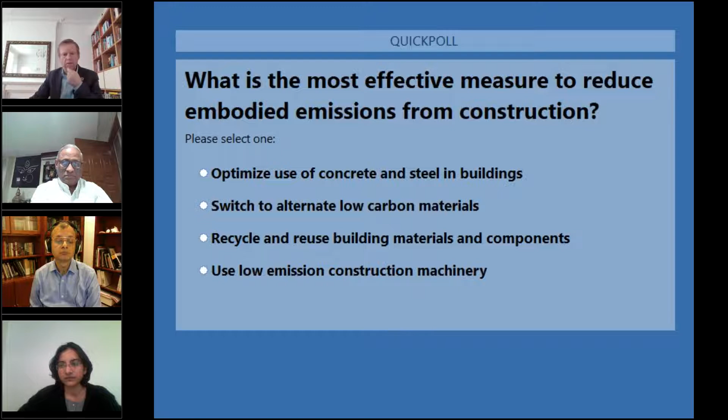I hope all of you can see the results of the poll on your screen. So the maximum vote we have got for the third option, which was recycle and reuse the building materials used. So thank you for sharing with us your response.

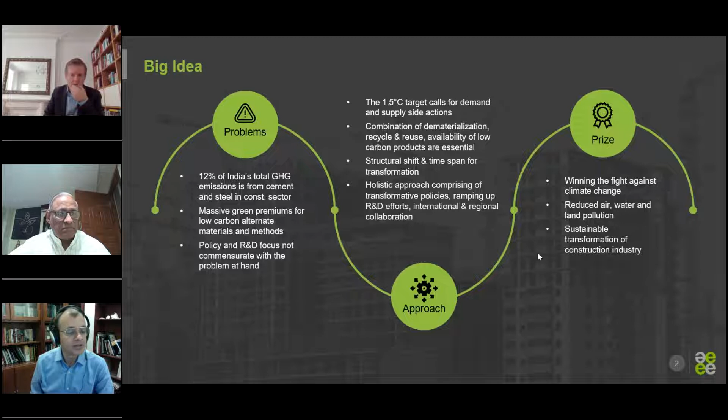So that is the problem, and I think we all would agree that the prize is pretty big to take it upon in a massive manner.

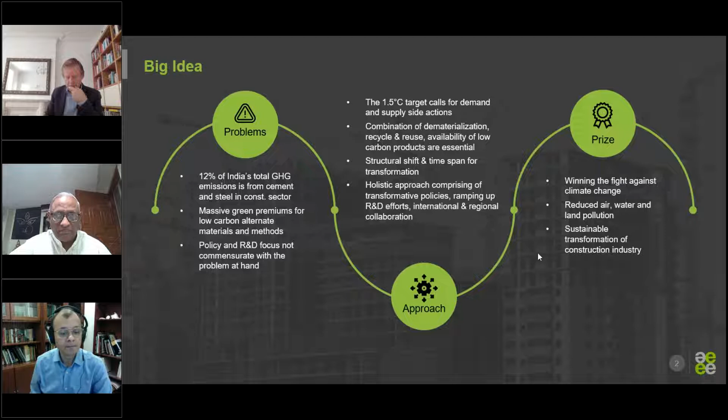So essentially, these are just numbers to set some context that I want to share with our viewers. If we look at the construction sector, the gross value added contribution from this sector is about 7%. It generates employment for more than 50 million people in India. So a fairly large number of people's livelihoods are dependent on this sector. So it cannot be that a problem we come up with doesn't start to address some of these challenges at the same time, which are more socio-economic in nature.

And when we talk about the economics associated with it, just the real estate portion - we know that infrastructure is where a lot of cement and steel is used. But just the real estate segment, we are talking about 65,000 crores. If I translate that in US dollars, it's about $8 billion, which is what the real estate market is. That is expected to be in 2040, and that is going to be about 5 times bigger than what it is right now.

If we look at the numbers in terms of the greenhouse gas emissions impact - as I said, 30% of the emissions comes from the construction sector, from the building materials that are used, and 40% is coming from the steel and cement sector out of that 30%. So its impact on greenhouse gas emissions is significant.

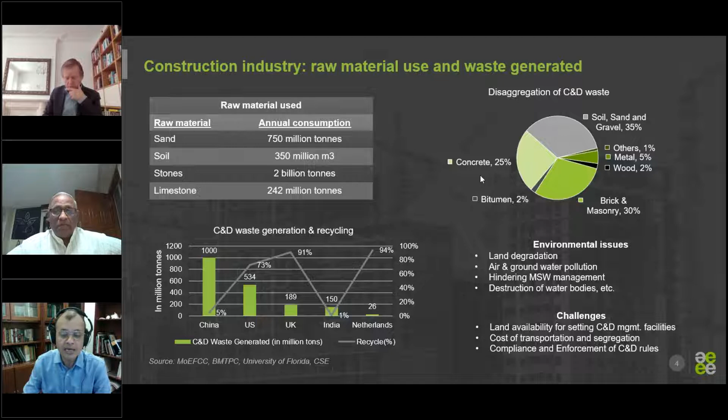So what has India done so far on some of these things? If we look at two aspects of energy consumption from a construction industry perspective, the first part is the embodied energy. I'm sure Professor Ashok Lal is going to talk about some of these things in his presentation. But most of the effort we have put in place, whether in policy or R&D, a lot of it is focused on operational energy consumption.

If we talk about building energy code, standards and labeling, or enhancing the efficiency of appliances, or even some of the later initiatives like global cooling prize and other things, most of these are clearly focused on improving operational energy efficiency. We don't really see what is happening once the building is constructed. Once the structure is ready, we forget about the embodied energy that went into the construction of these structures. That is a very important point I would like to highlight.

Same thing if we look at the PAT program, which is another very ambitious program of Bureau of Energy Efficiency, and it is doing well. But are we thinking about substitute materials for cement or steel, and what kind of innovation or policy push or R&D support is being provided? We don't see that becoming mainstream very soon. That's the challenge we face from the current actions on the policy, R&D, and technology fronts.

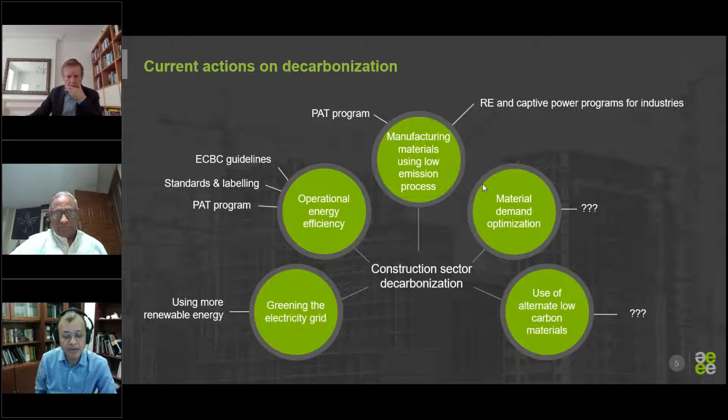So wrapping up, I go to the last slide where I'm going to pose three questions for our panelists. Different people are going to be addressing these questions. The first question, where Tim is going to be very well suited from his work at Arup, which does a lot of work in the infrastructure space and on the sustainable front: what is the best practice in terms of the international approach for low carbon transition in the construction industry, what could be relevant for India, and what should be the Indian future construction trajectory if we have to really grab this bull by the horns and take some concrete actions.

The second question is, what is the scope of design and construction innovation in this transition? Because we know that sustainable energy transition, keeping emissions at 1.5 degrees centigrade level, are very important questions for humanity right now. What is the role of the design and construction industry in this? And how can material demand be optimized for future building constructions to reduce embodied carbon in the structures and infrastructure that we are designing?

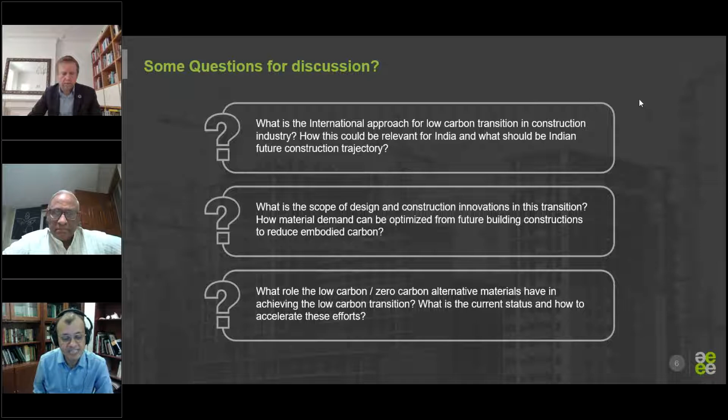The third and last question is, what role do low carbon or zero carbon alternative materials have in achieving the low carbon transition? How good are these materials? Are they ready for prime time? And what kind of policy or business support is required to make these materials mainstream? What is their current status and how to accelerate some of these efforts? Thank you very much, and I look forward to the discussions and to the presentations of my fellow panelists. Over to you, Shravani.

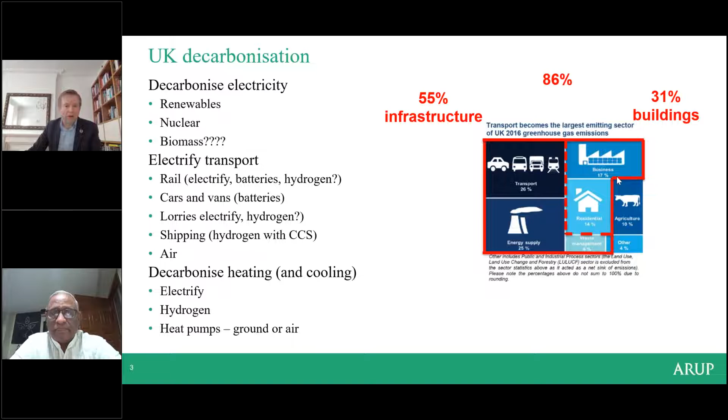The fundamental things we need to change here are how to decarbonize electricity, and the UK has done a huge amount of that over about the last decade. Very big changes to the grid, lots of renewables, new nuclear, and I'm putting biomass in question marks because we also have some biomass, and I'm very skeptical about whether that should count as low carbon. But these very big changes were made, costing an awful lot of money, but it's actually done an awful lot to decarbonize the UK.

We need to electrify transport: rail, cars and vans, lorries, shipping and air. We're making some progress on this, but not nearly enough. And we need to decarbonize heating—and I recognize in India cooling is a bigger issue for you, and there's lots of work to be done on that as well.

So we've just started on a voyage of how we can actually decarbonize a major economy. We've made good progress, but so far we've only really done the easy bits, and the more difficult bits are going to cost a lot of money and will end up also needing lots of societal change.

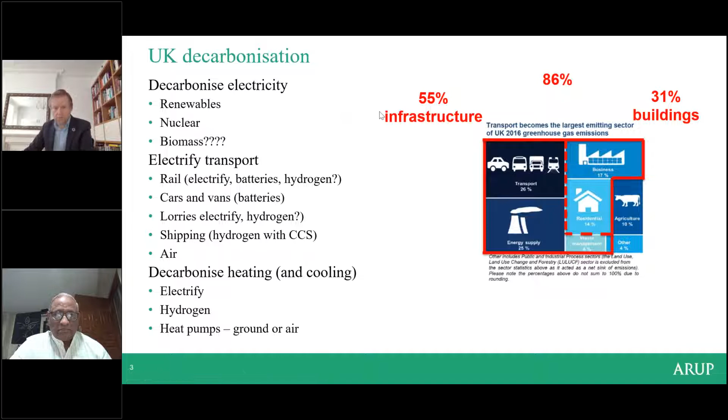I'm just going to touch on the topic of net zero. Overall, as a species on this planet, we emit about 40 or 50 billion tons of CO2 per year, largely in energy use, but also in some other areas as well. Doing this at a species level, on a global level, is fairly easy to understand how we decarbonize. We need to change the overall flux of CO2 going into the atmosphere.

As a nation, it's also fairly clear because our boundaries are fairly closed. There's some difference between the territorial emissions, what we actually burn in our particular country, and what we actually import and export, our consumption-based emissions. But overall, we can actually do these sums fairly clearly as well.

But in the UK, an awful lot of city regions and companies are declaring net zero, and it's actually quite difficult to know what they mean by this. And if they're just going to do it by offsetting, it might not be the right answer for us overall. So I love the concept of net zero, we need to try and achieve it, but I'm a little bit worried that a lot of people are declaring it but might not really be doing it, and this might not be so good for us all.

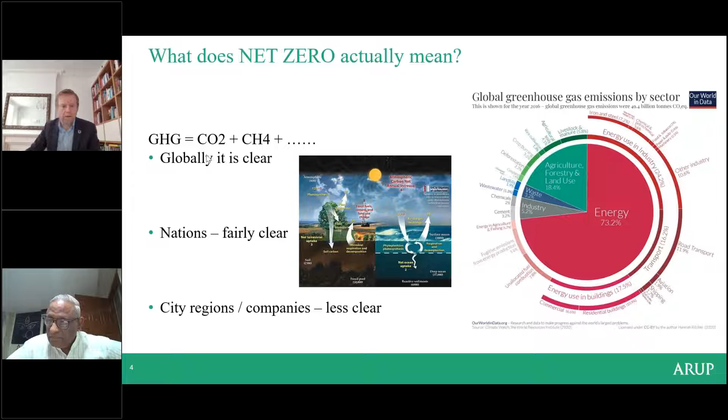And also just thinking about the society we wish to create—we're going to change how our whole economy works, actually change all of our power, all of our transport systems. We need to have a vision for a future that we all want to partake in.

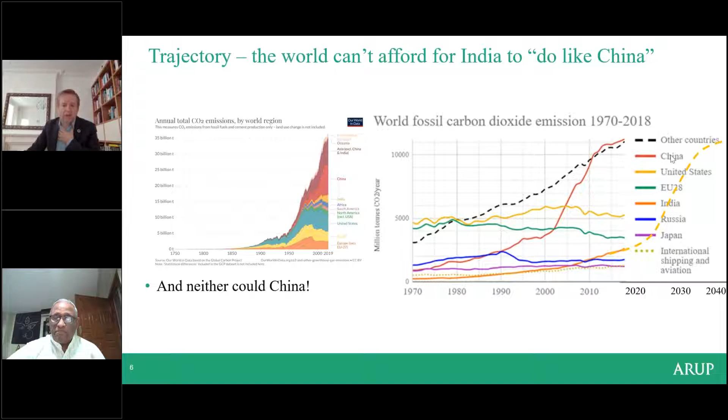Very quickly, were India to actually go on this very high trajectory, emitting 10 or 12 gigatons of CO2 per year, then India would have a huge effort to try and reduce that afterwards. The right-hand graph shows what China has done, the huge increase in its emissions, and now the necessity to get them down very quickly, which is going to have to change its whole economy.

So the critical issue here is trying to learn from what the EU and the UK are doing. The UK has done all the easy things so far. The UK emitted about a gigaton 10 to 20 years ago, but by stopping coal generation, adding lots more renewables, and also offshoring manufacturing—which doesn't help the globe at all—the UK has made some really big strides. The EU has now made the same commitment and is showing a similar trajectory, both trying to reach zero emissions by 2050.

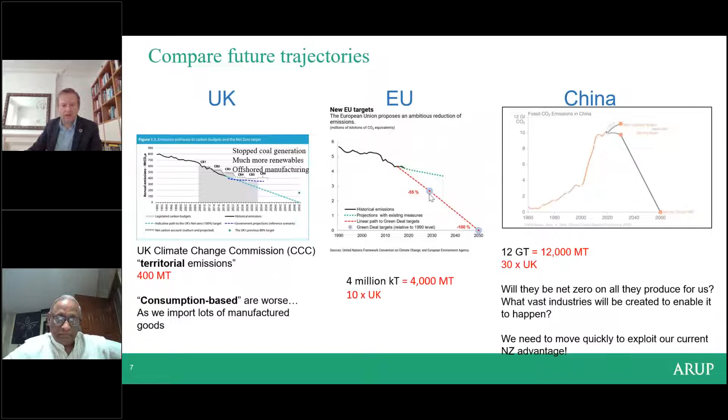So there's a lot to be done. To help with that, I'd like to introduce very quickly a standard called PAS 2080-2016. It's being updated at the moment and is likely to become an ISO, so it will basically be one of the UK's gifts to the world. We worked out in a very complicated way how we could decarbonize construction, and especially infrastructure. This is the world's first standard for managing whole life carbon in infrastructure systems, and as part of the update, it's going to be extended to buildings as well.

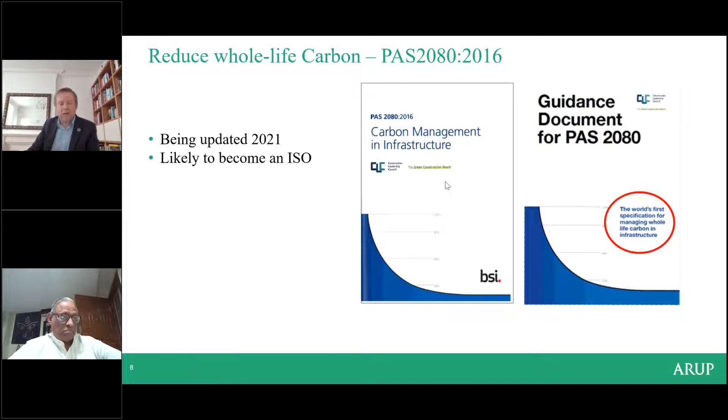Very simplistically, what it tries to do is create the correct big picture view on everything. By looking at everything on a national basis, it gets rid of perverse incentives. Very simply, it defines carbon as capital carbon—also known as embodied carbon—operational carbon, and use carbon.

So giving the example of a major airport: capital carbon is actually building the terminals and the runways. Operational carbon is how the airport is run—so the lighting in the airport, the ground staff who maintain it. And use carbon covers all the people who come along, fly planes, land them, and the carbon they emit.

Currently, these are excluded from international debate about carbon emissions. They're excluded from national figures and left in their own box, so nobody really owns them. But increasingly they're being owned, and Britain is now taking measures to own its use carbon figures of what we emit globally. From the airport operator's point of view, they can control the first two, but can only really influence the airplanes that fly into the airport and things like that.

So the critical thing here is PAS 2080 allows us to invest to save and optimize to reduce. It uses the same terminology as CapEx and OpEx, which we use for money, and I think that makes it very easy to relate to. I'm not going to go through the figures in great detail, but it shows what happens with UK emissions in each of the infrastructure sectors.

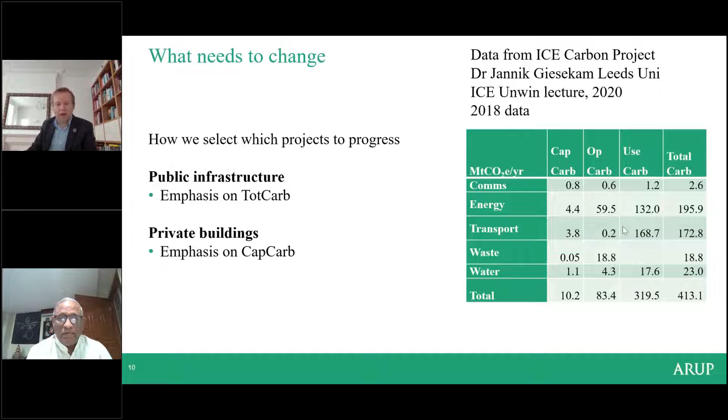There's no point, as an example, building a new road that can only take gas-guzzling cars and hugely emitting heavy goods vehicles. We need to make sure India creates a transport network that's also easy to use in a low carbon way.

So how should we pick the right projects to build? We need to make sure there's a clear investment case. In the UK this is called the Treasury's Green Book, which goes through how government should appraise schemes. Traditionally this is really focused on the benefit to cost ratio, because money talks, and the Treasury is worried about spending money and getting good value for it. This will still persist in the new world because money remains scarce.

But actually, carbon is scarce as well. And therefore we need to talk in the same way about BCR - we need to talk about value for carbon and making sure every project we do is a step towards a low carbon future. It also should enhance society, make sure we worry about societal capital and enhancing nature as well.

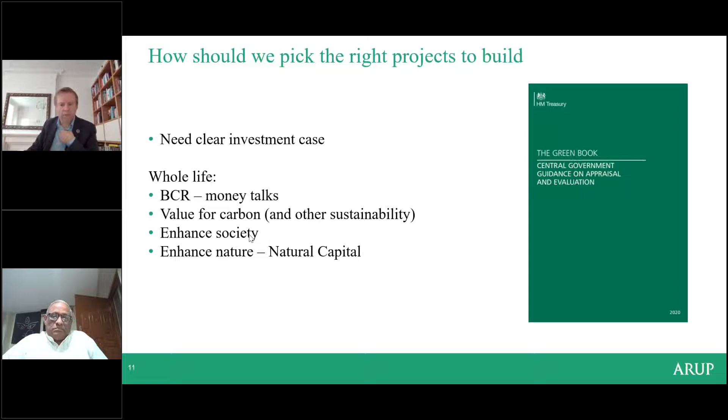But we also need to make sure that as we do the projects, we satisfy the client's sought outcome and we don't compromise whole life carbon. An example, a new rail project - I'm seeing people at the moment building examples like High Speed 2 in the UK, a very major new high-speed railway line. People are trying to make the capital carbon smaller, but actually the critical thing is the stations we build are attractive to users, so we stop people using their cars instead. The critical thing is to solve the total carbon problem, not just the capital carbon.

And we have the hierarchy of doing things: building nothing, building less, building clever, and building efficiently. Sometimes the best thing to do is to build nothing and use technology or something else as the right solution. Then we work our way down this hierarchy, and ultimately, where we have to build something, build it efficiently instead.

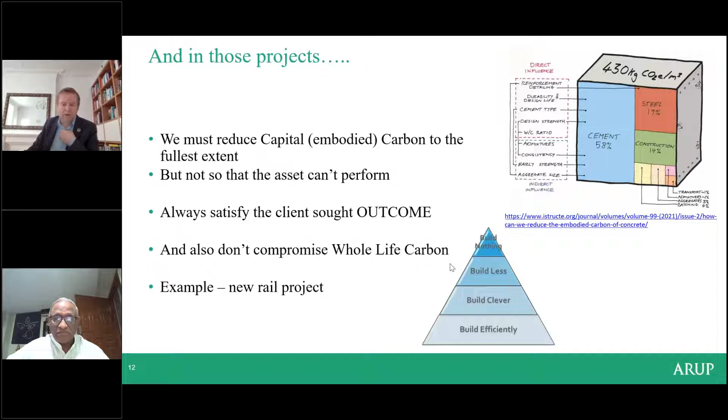So for India, echoing what Dr. Satish said, we need to mitigate for 1.5 degree warming of the world - it's absolutely critical we follow this. India's got the chance to avoid the mistakes we've made in the developed world. Every Indian has the right to become fully middle class like we are here in the West, but do it in your own better way. Go straight for the right answer - don't make the same mistakes that we have made.

So invest in public transport, but make your cities livable at the same time. Invest in electrified rail, make freight transshipment simple. Use solar and other renewables - we all need to find better batteries. Ban coal quickly and invest in nuclear.

With lots of hydrogen and carbon capture and storage and everything else, and ultimately direct air capture to make sure we capture the errant emissions. Choose the right buildings, make them flexible and capable of repurposing, so you don't need to keep on rebuilding them like we have done here, and make the circular economy work.

But in parallel, we all need to adapt for a 4 degree warming as well, because I must admit I'm skeptical about whether we can do enough quickly enough to make the changes. So we need to mitigate and we need to adapt. That's the end of my talk. Thank you very much for your attention.

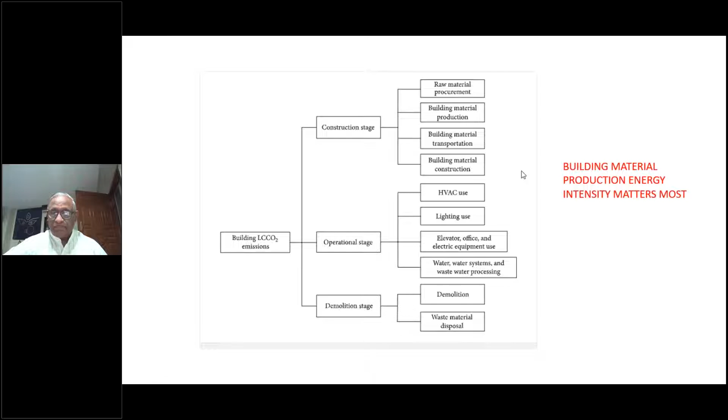I think this is just a kind of a review of the overview on buildings that Tim was also showing us, just to say that in this particular talk we are talking about the embodied energy in building construction, particularly the materials part of it, the production of materials and the use of materials in the buildings. I'm ignoring at the moment the transportation and the lifetime and the recycling potential of it, etc. Just looking at only the materials that are consumed in the making of the building and the embodied energy cost, so to speak, of the making of those materials.

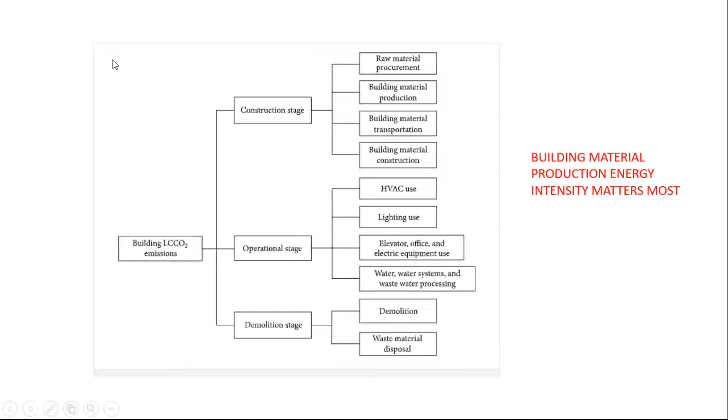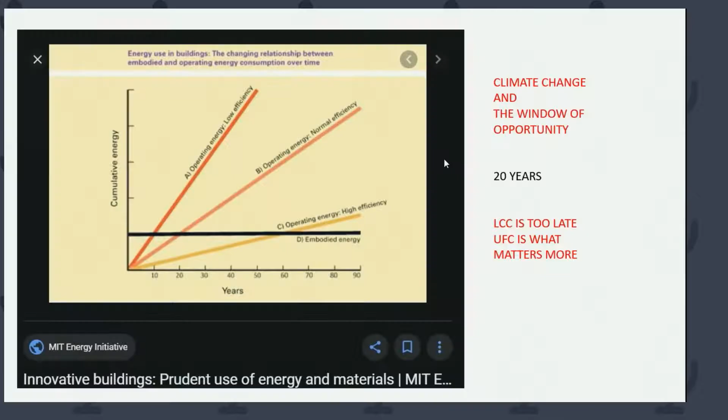This is an important slide because what it shows is the black line indicating embodied energy, which, according to the theory of life cycle costing, can be amortized over the life of the building, which can be 60, 70, 80 years. This was at a time when the operational energy of buildings was quite high, especially in the West, and that is the red line going steeply up. As you improve the performance of buildings operationally, that inclination begins to come down, and eventually, as you get very efficient buildings, almost net zero emissions in operation, you get a much flatter line. But what it does show is that embodied energy becomes a more important component of the overall contribution of carbon dioxide emissions.

What I really want to point out is that if we say we have a window of opportunity of not more than one or two decades within which to reduce the carbon footprint of buildings, then especially in India, when we are going to multiply the amount of building needed for a growing population in the process of urbanization, we have to pay a lot of attention to embodied energy. That is actually the greater job than the operational energy, especially of housing stock.

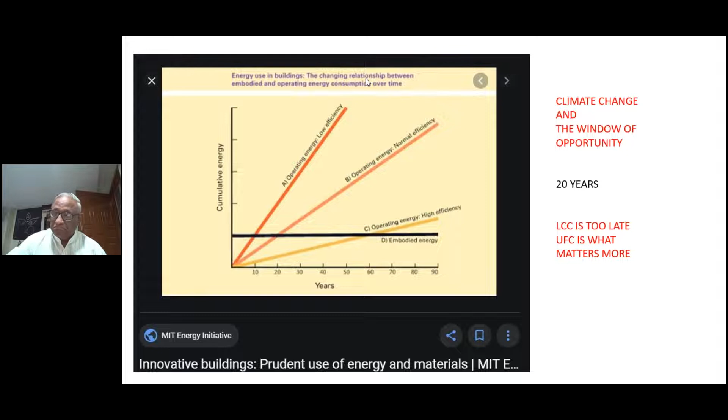Next. In buildings, this diagram is a very simple one, but what it shows is that something like 65 to 70% of the embodied energy of a building is attributable to what we call the structural system and the external envelope of the building. So this is where the bulk of the embodied energy is located. When you have very intensively serviced buildings with a lot of air conditioning, piping and servicing, that also, because of the extensive use of metal, becomes quite a significant consumption.

But in our case in India, most of the buildings we are going to be building are going to be relatively simple in terms of the services they incorporate. So actually 70 to 80% of the embodied energy of construction is attributable to the structural system and the building envelope itself. Next.

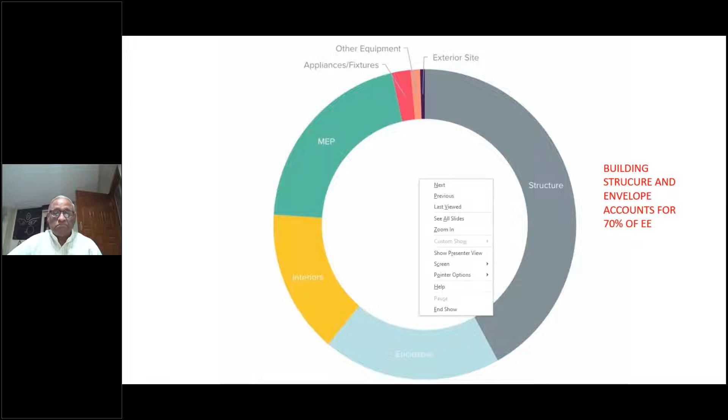This is a project we did several years ago, and we did an analysis of it. What this analysis shows is that, as Tim said and as Satish said, steel is a big culprit here. Steel and concrete and reinforced concrete are the big culprits. So you'll find that by mass, steel is not more than 2 to 3% of the total mass of a building. In cost, it's significantly higher. And in embodied energy, it takes the cake.

So here's a good pointer. If you're going to have a strategy about controlling carbon emissions in building, watch out for steel, watch out for concrete. Next.

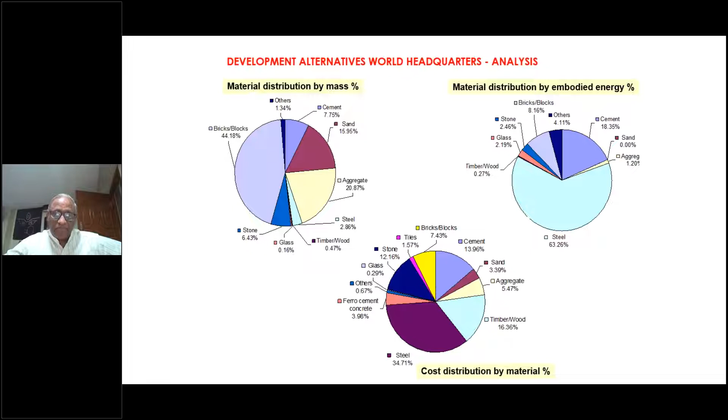The other thing to look out for is that we should look at 3 kinds of buildings. I'm talking about residential buildings here. So we have lots and lots of buildings which are now becoming 2, 3, 4 stories high as cities become more dense and land becomes a little bit more scarce and people want to live closer together, 3, 4 stories high. But in some cities, they say no, you must build taller. They go 7, 8 stories high. And in some cities they say, no, you can go as tall as you like, and you build 10, 12, 15, 20 stories high. So you've got these 3 kinds of buildings that are coming up.

And there's a shift. Somehow the belief has gone around that you have to go vertical. You have to go vertical. You have to be like Singapore. You have to be like Hong Kong. You have to be like New York. That is modern, that's the way to the future. Something is wrong in that calculation. And we will see now why, if you just compare the sizes or heights of buildings. Next.

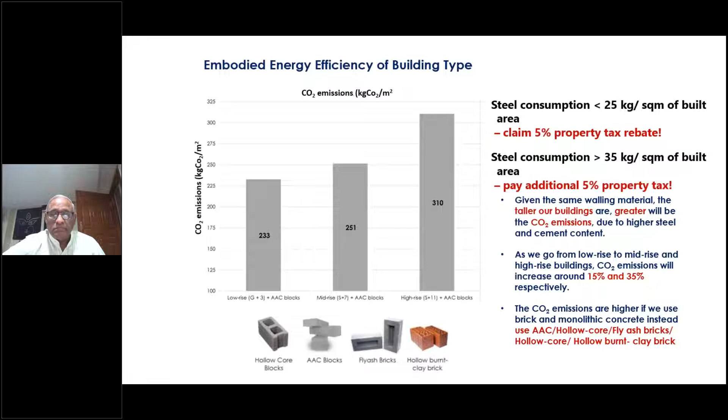It's not only about substitution of materials, it's not only about economical design for whatever you have to build, but it is also about making choices about the kinds of building that we need to build in order to conserve embodied energy. And also there is a potential of substituting some of the walling materials, the infill materials. There's a movement towards all reinforced concrete walls inside, outside, everywhere. They think that's the right thing to do, but it's going completely in the opposite direction from trying to reduce embodied carbon in construction. It is actually accelerating the increase in carbon emissions due to construction, if we go that way.

Next. When you click more, something will come. Next.

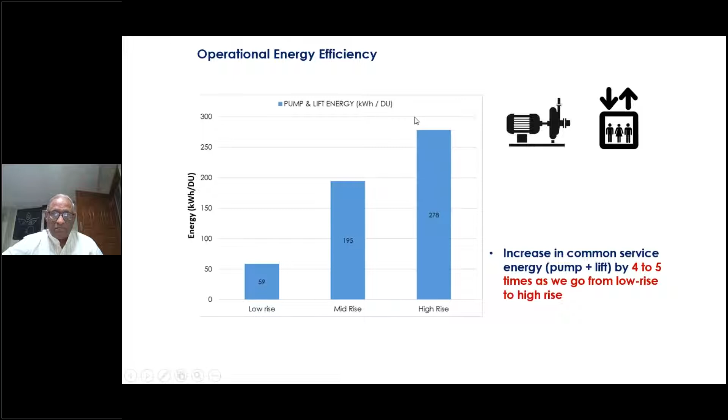So I just want to show these 2 slides just to say that as you go taller, your operational energy also goes up. And as Tim was saying, not only do you want to conserve energy at the time of construction, you want to conserve carbon at the time of construction, but you also want to build in such a way that later on you don't have to pay a price for it. So again, building taller has that difficulty.

One interesting thing for India, particularly if you're talking about net zero possibilities for the future, is that the ratio between the rooftop available for converting sunlight into electricity, if you're going 4, 5, 6 stories high, is favorable for you. You can find almost 80% of your annual energy needs for simple living in homes if you build 4, 5 stories high. As you go taller, that ratio deteriorates. And so there's another reason, looking at a total systems approach towards net zero. Next.

Also, it so happens that steel and concrete are really the more expensive part of the building in any case. So if you save there, you make buildings more affordable. So it's really about choosing the type of building and also choosing how you build the structure and the envelope. Next.

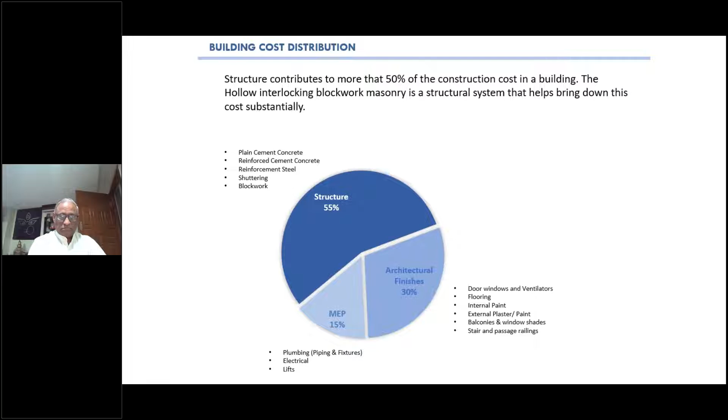Well, this is just an example of a building that was built about 10, 15 years ago. Development Alternatives. Next. We'll talk about it a bit.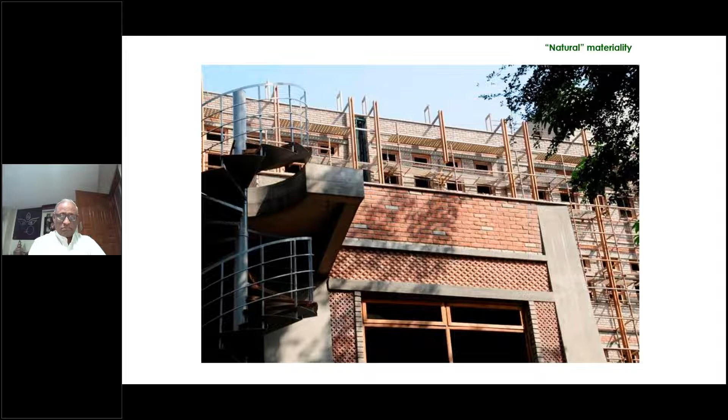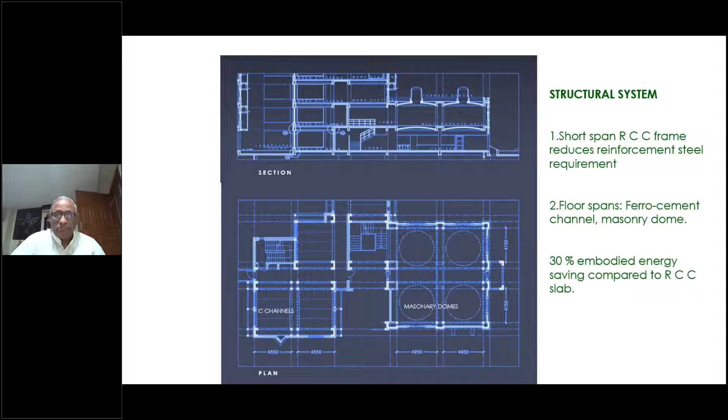Here, what was done was that the horizontal spans were either ferrocement shells or shallow domes. And the ferrocement shells significantly reduced the amount of steel consumed in spanning the space. And the shallow domes eliminated this steel entirely. There was no steel, no concrete. It was just a masonry dome, but it was shallow. So this was an innovation, not very scalable, but it was a demonstration of how ingenuity and design can still, for modern buildings too, work with less steel consumption. Next.

Here's a picture of it.

On the right-hand side, you see the shallow domes. On the left, you can see a substitution of the external walling material. Here, the old earth building, in place of which the new building was built, was pulverized and converted into cement stabilized blocks in combination with an inner lining of earth blocks and an outer lining of fly ash blocks. So very low embodied energy in the external envelope of the building.

It's a substitution of what might have been traditional brick or concrete. And this is, you have to think about the detailing and the use of timber for doors and windows—well detailed, well seasoned timber instead of aluminium. And actually you get very high performance windows at the same price as modern aluminium windows, but at 1/20th, 1/30th of the embodied energy cost.

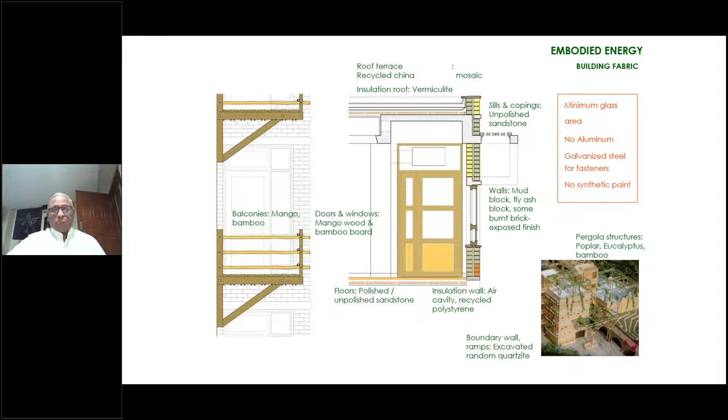Here's the alternative materials that were used for walling. There are many options that are still available, and people are moving in that direction gradually. But still, it's not quite scalable. That's the issue. I think it's a question of getting, if there's better demand and the quality—because this is not always formal industry—and the quality can be assured, scalability will arrive.

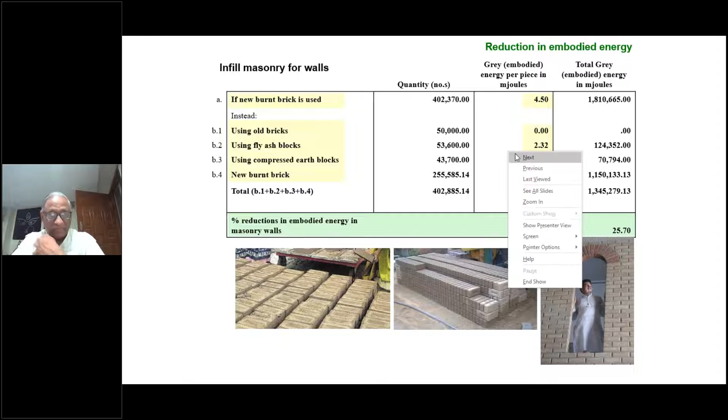This just shows that whether it is in the structural system, whether it is in the infill system, and whether it is in the doors and windows or other subcomponents, in each of these departments, there can be a strategy of reducing embodied carbon significantly.

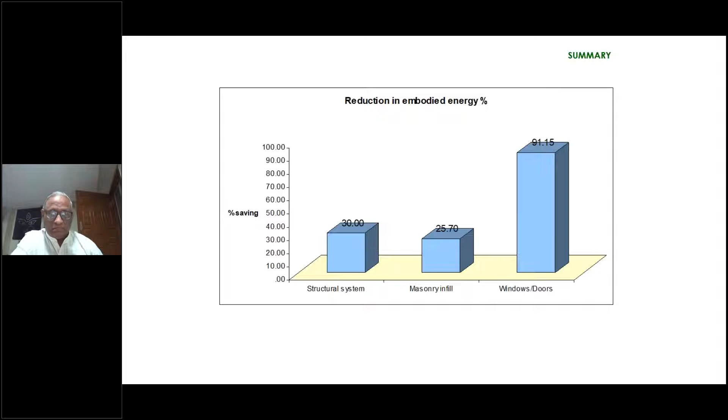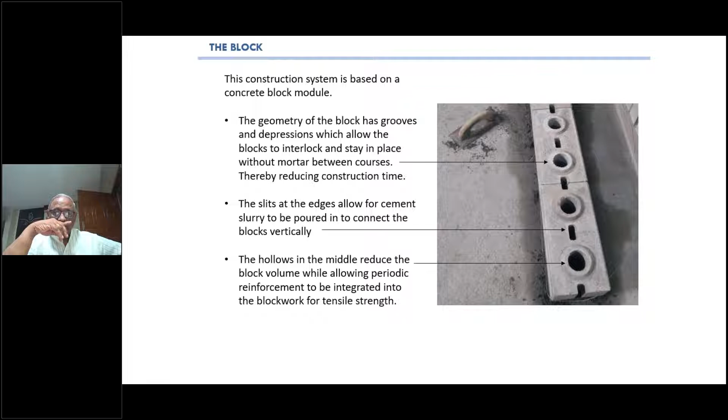Very quick because it interlocks and you don't need any mortar in between. In the annular spaces, you pour the mortar, and you can occasionally also have reinforcing bars with concrete around them. Now, this is the principle of contained or constrained masonry, where the constraining of the masonry by introduction of the bars with a bit of concrete takes care of the lateral loads of earthquakes and wind, and the masonry itself becomes a load-bearing system.

This is very good up to about 4 stories high, quick to build, very economical, and reduces steel intensity in the construction by a good 15 to 20% compared to an RCC frame.

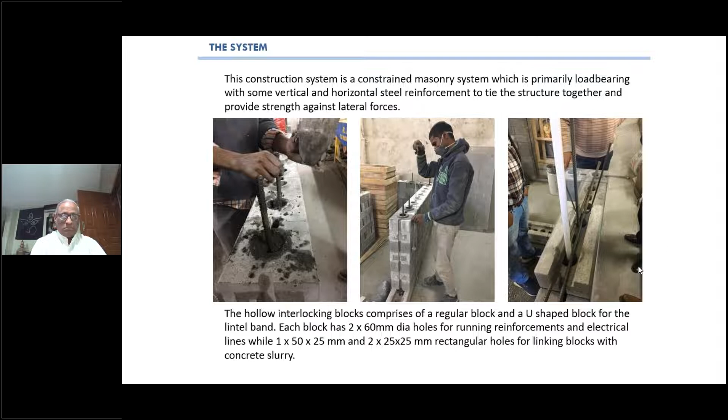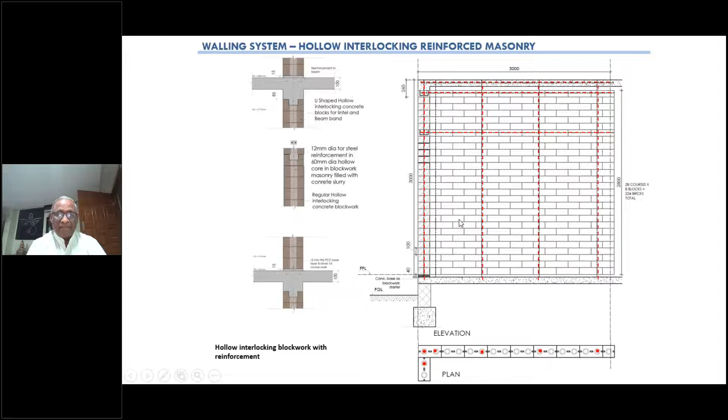This has now been tried and tested and designed, and it is waiting for formal approval from the Building Materials and Technology Promotion Council. Here's the system—very appropriate for affordable housing, up to 4 stories high, small buildings, not large spans, very little steel consumed. We'll talk about the quantity in a little while.

And this is how the system has been actually tested for its structural stability in Bangalore at a technology institute, and now it's been certified.

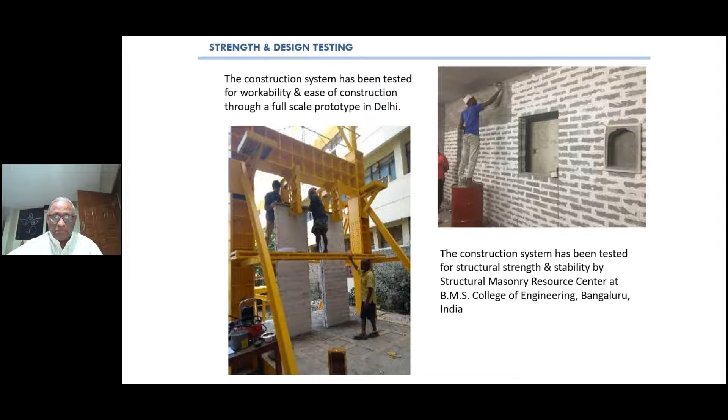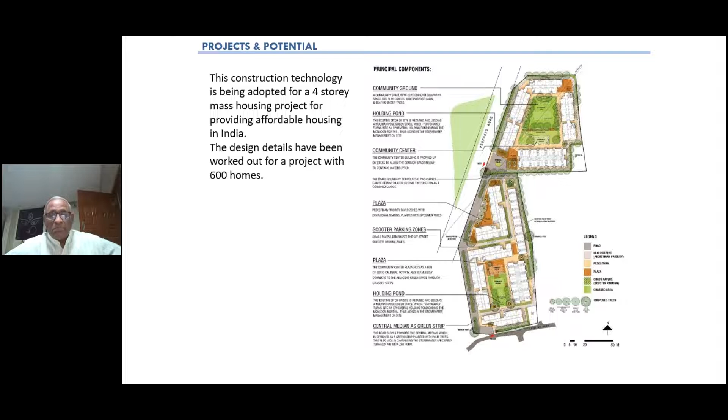It has now been proposed for a housing scheme in Tamil Nadu—600 homes are to be built using this technology. It was great that the client was willing to understand it and move with this innovation. We really do need some clients like that, and we certainly need the state to look for such innovations. We'll talk about those innovations later in our discussion.

Here's another thing—there's a factory now established in Calcutta that's going to produce these lightweight hollow clay blocks. Same principle, but using clay instead of concrete.

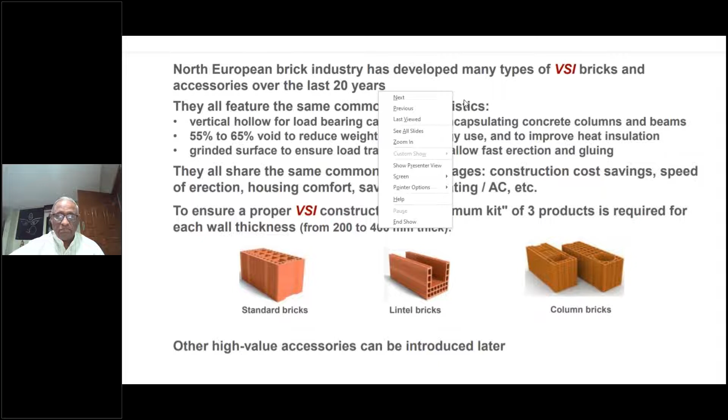You have these annular spaces which you can reinforce. This has the added advantage of lighter weight, but fairly good strength. Again, you can build up to 4 or 5 stories without any difficulty. And also insulation—so it's very good for external walling if you want to reduce the heat flux from outside to inside.

This is, of course, developed in Europe as a system. A new factory has been put up in Calcutta making these blocks. Something similar had already been established in Kerala earlier, but it hasn't been scaling, and it really needs to be promoted. The only difficulty in this technology is that it's rather a high investment industrial production system, because these blocks are extruded by pressure extrusion using very good quality and well controlled clay—very different from the concrete block I was talking about earlier, which is almost like a cottage industry. You can produce that as a cottage or small scale industry, whereas this one becomes a bit of a capital intensive industry.

You have similar solutions for horizontal spans, where in the structural design you increase the depth of the slab, reduce the steel reinforcement, use filler blocks to reduce the weight of concrete, and thereby overall reduce the carbon emissions of the constructional system. Instead of these clay filler blocks, you can use lightweight concrete blocks also.

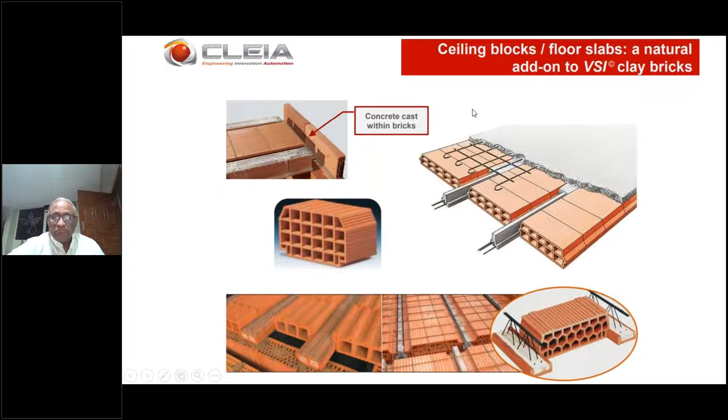This system has now been, from a theoretical point of view, practically tested using clay blocks for seismic loads.

Sorry to interrupt you, sir, you have one minute to wind up your presentation as we are running short on time. Yeah, I'm just about finished. Yeah, we'll move on quickly.

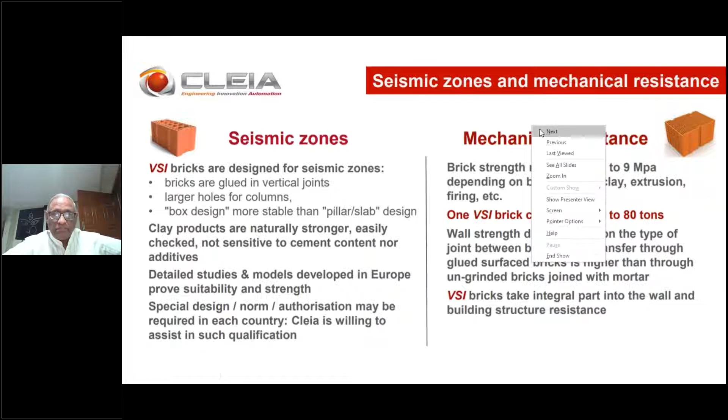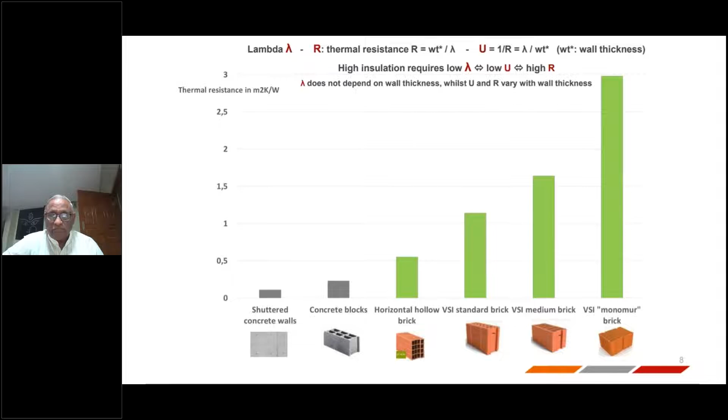This tells you about the thermal properties of this particular product. As you know, this is very much better from that point of view compared to the solid concrete block. And again, it answers Tim's point about building with low carbon to begin with and reducing carbon emissions in operations.

Here's my proposal for policy: have a carbon tax on construction, focused on steel. If you're consuming less than 25 kilograms per square meter of your built area of steel, then you can claim 5% back on your property tax. But if you are spending more than 35 kilograms per square meter of built area on steel, then you should pay an additional 5% property tax.

This is a rhetorical proposition, but this is really the crux of the issue: how to give designers and builders an incentive to go in the right direction. It just means intelligent design.

And finally, if we are talking about solar cities and towns for the future towards net zero, you have to talk to the town planning people. You have to have low-rise, high-density as the predominant form of construction, because that will be low carbon to construct now, more affordable now, and low carbon for the future in its operation through its lifetime also. That's a strong recommendation.

Good afternoon, everyone, and thanks AEEE for the opportunity. So we are now going to address a new area of decarbonizing construction.

As a lead auditor, I always advocate these 8 points to all our clients. That is, when you plan your project and start your design, that's what I mean by start early, before starting the project itself, you start working on your carbon footprint. Heating, ventilation, and air conditioning is a very big thing to be addressed. I always advocate continuous working with no stoppages, whether it may be construction, foundation, or insulation. This is one area where I think we can reduce a fair amount of carbon footprint.

Lighting is another area, and how much recycled material we can use is very important. We see in Tim's presentation it accounts for almost one-third of the whole carbon footprint. Water usage is very important, and of course the amount of renewable energy we can build into the project is equally important. The location of the project also adds a lot, including local materials, logistics, and other things.

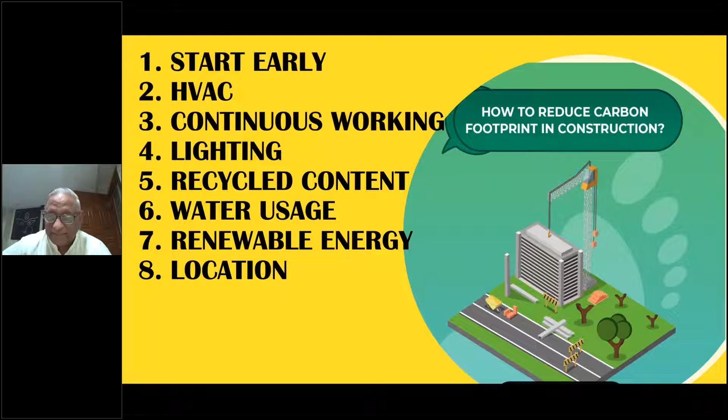Global warming, as you all know, is man-made. A lot of human activity has added to concentration of greenhouse gases. A lot of natural resources have been extracted for construction and building materials, and they consume energy, and there is a degradation of environment that contributes to global warming. Buildings, as other speakers also concurred, are the largest energy consumers and greenhouse emitters, so we need to address this more precisely.

So let us see what the construction area can do to mitigate this. The first thing is to use materials which are more efficient. The next thing is to use existing buildings better so you can cut down on demolition. You can switch over to lower emission materials and use lower carbon cement, that's what we're going to talk about now. Then you can recycle building materials and components, and use very low emission construction equipment. Now I'm going to talk about low carbon cement, which addresses all of the first 5 areas.

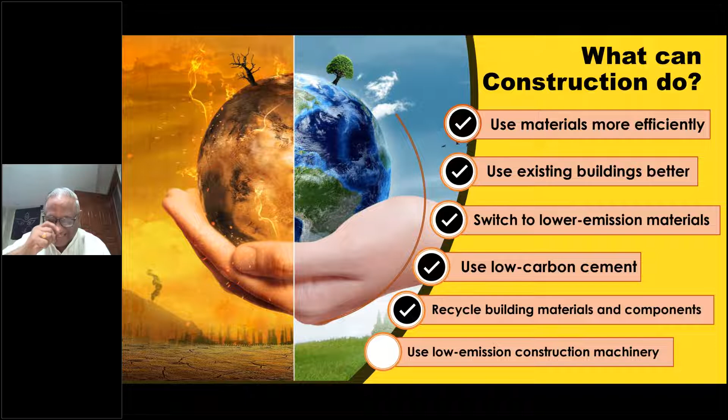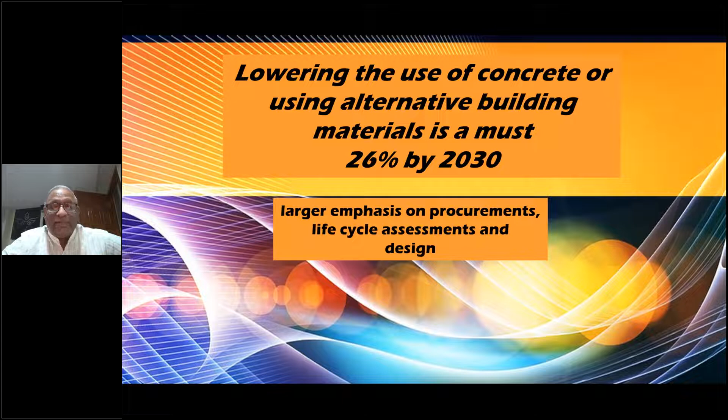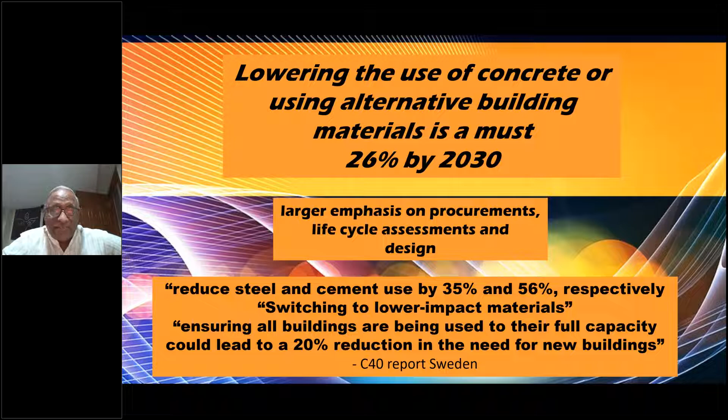The report from Sweden says that we have to cut down 26% of the usage of concrete and use alternate building materials by 2030 to maintain decarbonization standards. This means there's a larger emphasis on procurement, life cycle assessment, and design of the buildings.

35% and 56% are what we need to reduce in steel and cement, according to this C40 report from Sweden. If you're able to occupy all the built-up area in existing buildings, there is a 20% reduction in the need for new buildings. If all these things are addressed, they say about $11 billion will be saved in New York and in London.

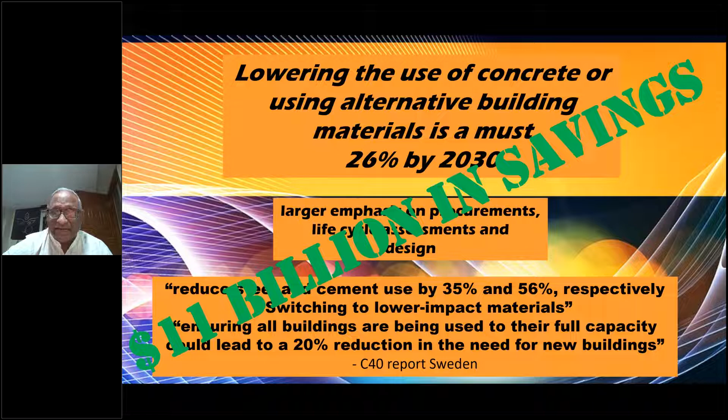So let me tell you something about the low carbon cement. I call it the lowest carbon cement. It's a geopolymer cement, and the concrete is called geopolymer concrete. It's quite new to the market, and I'll give you a small comparison with ordinary Portland cement, telling you about the energy emission and the scope for utilizing waste. It's a very important aspect, along with policy changes, certain directions, some demo projects that have been done, and the technical barriers and challenges we need to address.

So when we talk about a new product, a new cement, let us first address: is it cost effective? Is it quick setting? Is it user friendly? Is it eco-safe? Is it recyclable? Does it use less capital? Does it reduce water consumption? Does it increase more strength to the concrete? Or are we using more local materials? Maybe all of them are part of what we should address.

Generally, we can consider an alternative material, and the material we are going to consider now addresses most of them. We are going to talk about geopolymers. This is the new way of making buildings. They are alkali-based cements. They use natural resources and waste streams from industry. There is no water required, and we don't need ordinary Portland cement or any additives to make this concrete. And it is 100% recyclable.

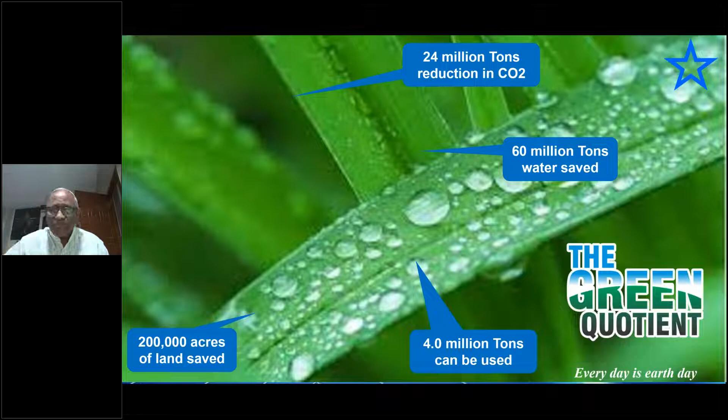Let us see what is the green quotient on these geopolymers. We can say, equating to a 1 million ton cement factory and the construction proportion to that, we can save about 24 million tons of reduction in CO2 and 60 million tons of saving in water. About 4 million tons of waste can be used, and about 200,000 acres of land saved as landfill and mining. And of course, the fire and heat resistant properties add to the benefit of this concrete.

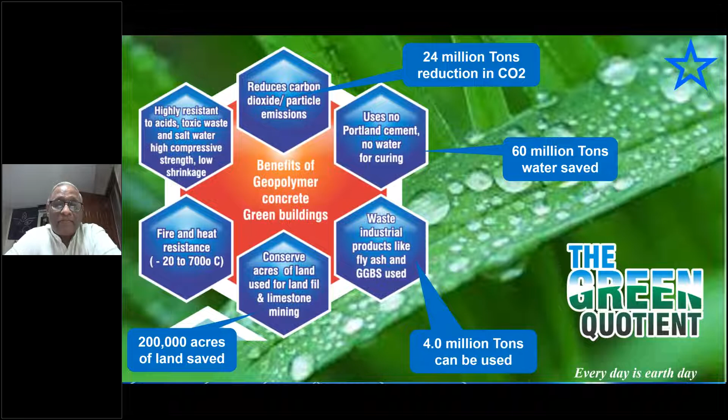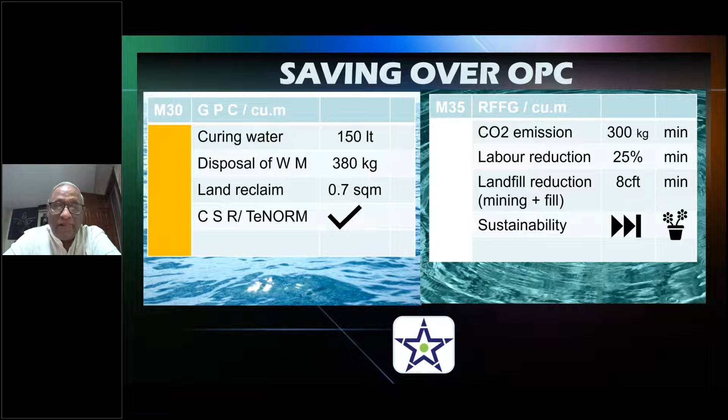So let's see what type of industrial waste or mineral waste can be utilized in this concrete. We can use red mud from the aluminum industry, ash—rice husk ash or wood ash or fly ash from different industries—and steel slag from the steel industry, from direct reduction or whatever furnace, we can use that steel slag. Demolition waste can be totally used in this construction, and of course copper slag to a large extent.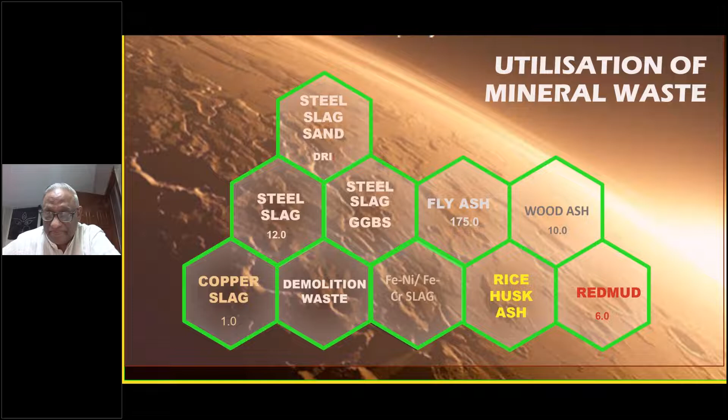The changes needed in government policy for using this new low carbon cement are: they should make waste stream usage mandatory for all people generating waste, and waste producers should share disposal costs as part of their project responsibility. There must be a mandate on this.

Contribution to the development of technology and testing is very important for new technologies. There must be a contribution from the industry which produces waste streams, and CSR funds have to be used for waste utilization to restrict landfill and mining. There should be another rule on this.

This new technology can be used in government projects, defense projects, like Swachh Bharat, pothole filling, and reclamation. So government should encourage such new technologies and collaborate for R&D and application development with people who are already owning or developing technologies.

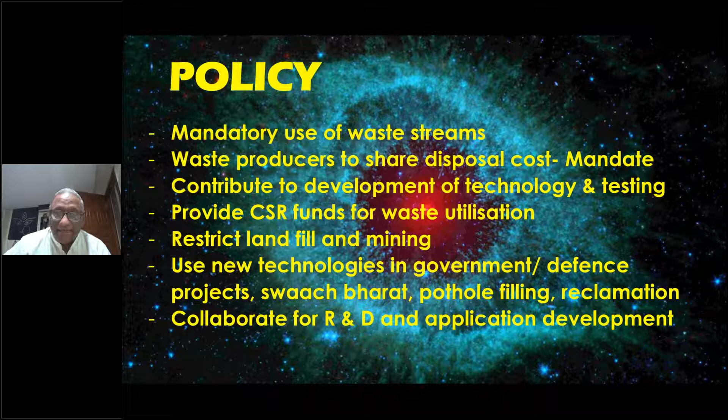The products best suited for using this geopolymer concrete are coastal armor, waste containment from heavy metals and other materials, and instant container homes for disaster relief. There is an application called shotcreting where it can be very nicely used, along with concrete roads, extraordinary heavy foundations, 3D printing of homes, and flame resistant concrete. These are very critical types of concrete that we can develop.

You can see in the photograph a 3D printed home built by us using our material, and flame resistant concrete used in a security zone in Switzerland. The last one shows shotcreting using a remote shotcreting gun in a project in the USA.

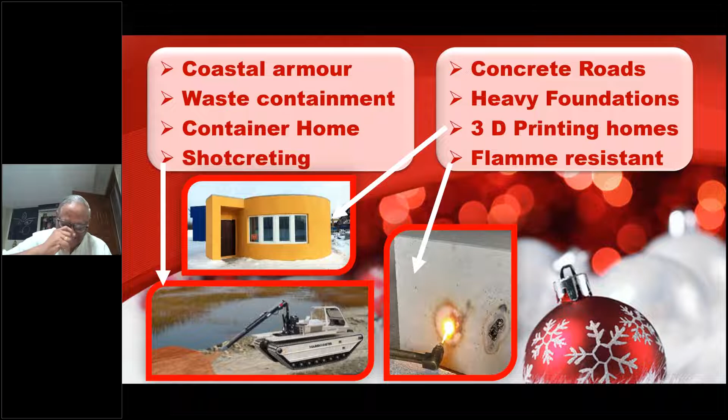In India, we have a very large coastline and a big budget on defense, so there's a lot of scope in adopting this new technology in these areas. We have about 7,500 kilometers of coastline which need to be protected due to 2 to 3 cyclones in the East Coast every year, and we also need to do some reclamation projects where this material will come in very handy.

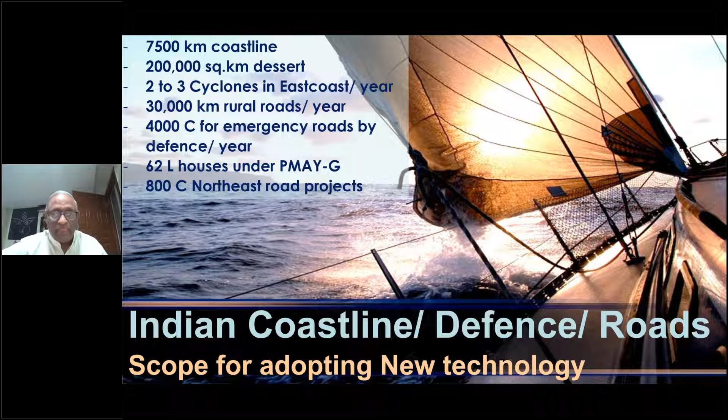I want to share with you the technical barriers in using this material, which includes the need for good R&D facilities. We have one in India and one in USA, but that's not sufficient; we need something much bigger that should be available to the public at large. Then we need special standards. A new standard has already been formed and circulated, but still that is not enough; we need more standards like the normal Portland cement concrete standards.

The raw material logistics, since about 30% of the material is waste material, needs proper arrangement, which will improve the usage of waste material and reduce cost. A lot of demonstration projects have to happen to showcase the product, along with training of technicians in core areas where this new technology needs to be used, and public awareness on the technicalities and usage has to be created.

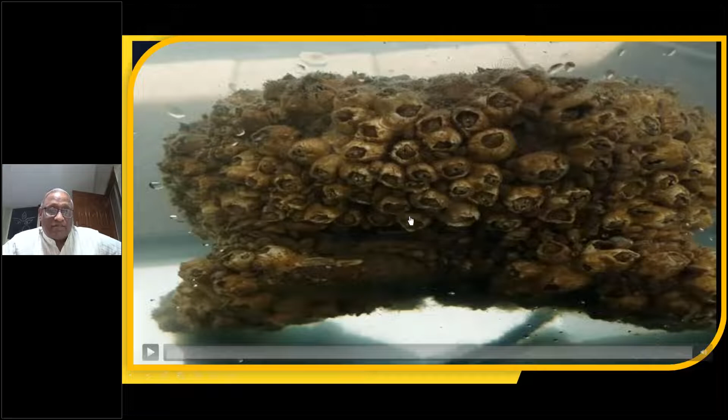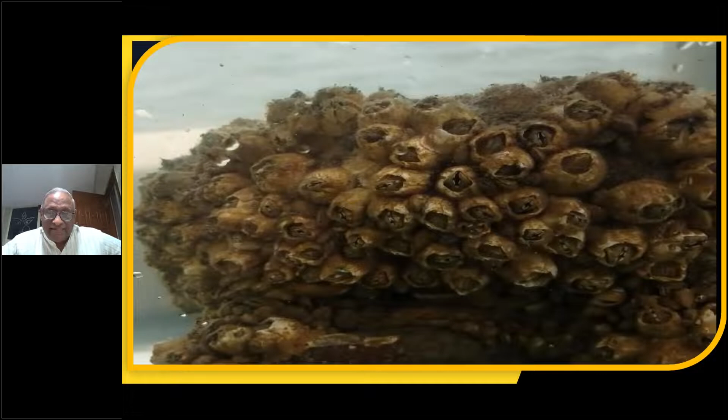I'm showing a video of a product called BioRock, made with geopolymer, made in our lab. This is about a 40-second clip. This is my geopolymer rock that has been in the water for about 18 months now, and the rest of the things around here aren't looking so well, but this really has a lot of shellfish growth.

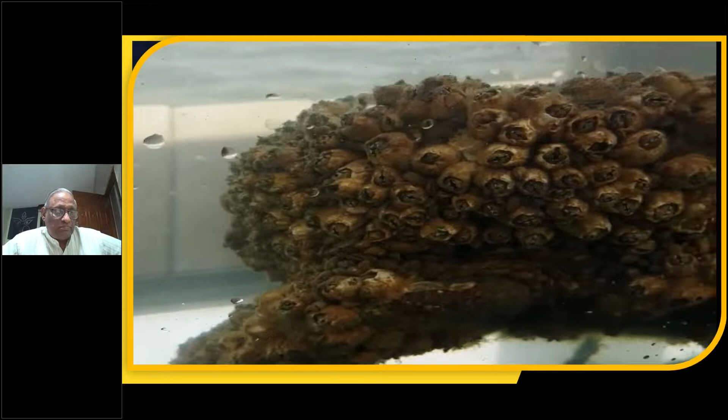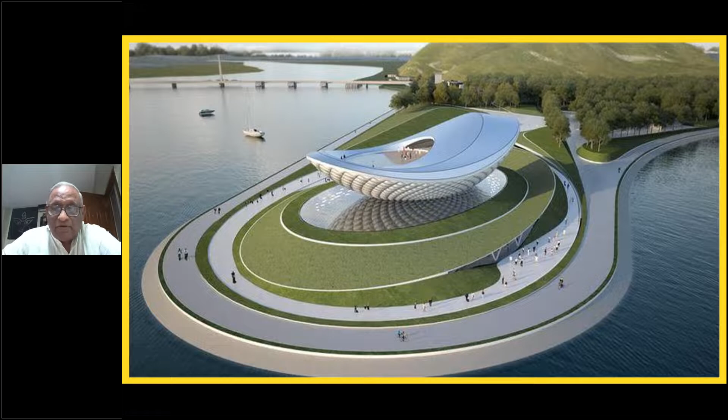Coming to the last slide, what you see is a type of auditorium planned using waste materials and geopolymer concrete in the city of New Orleans to commemorate the 300 years of the city. It's called the Jazz Center. The project is approved, it's crowd-funded, and will be in stream in the next 6 years. Thank you for the time allocated.

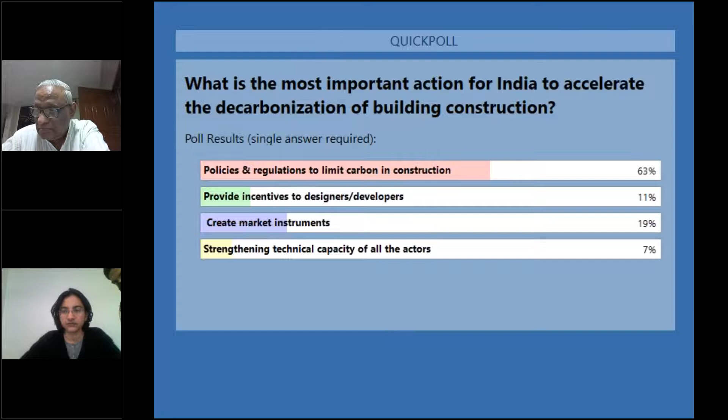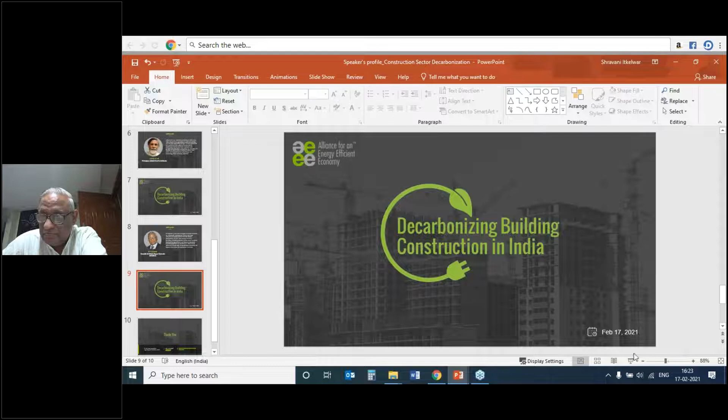Recycled aggregate is obviously aggregate recovered or made out of demolition waste, and it needs to be graded so that it is of appropriate form and strength to be included as aggregate in new concretes. For low strength concretes, there's a great chance. For anything up to, say, M10, M15 concretes for constructions which are not very tall and don't carry much load, I think the potential is high, but standards and norms have to be established, and appropriate recycled aggregate material has to be developed and put into the market stream. Then I think there's definite potential.

But I do want to say something about the circular economy concept. In a place where we are urbanizing rapidly and populations continue to grow, where standards of living require more construction to happen rapidly, the circular economy is only going to take care of maybe 5 to 7%, or possibly 10%, of your total demand. The rest will still have to come from fresh resources. I haven't done my arithmetic on it, but that's my broad understanding.